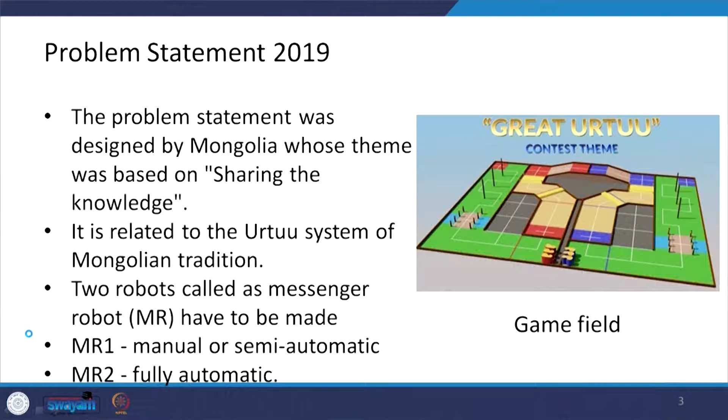Before we start, I would like to give you a brief of the problem statement. These few slides will be a repetition of the previous lecture, in order to maintain continuity. The problem statement was designed by Mongolia for Robocon 2019, and its theme was based on sharing knowledge. It is related to the Urtuu system of Mongolian tradition. Two robots called messenger robots have to be made: MR1, which is manual or semi-automatic, and MR2, which is fully automatic.

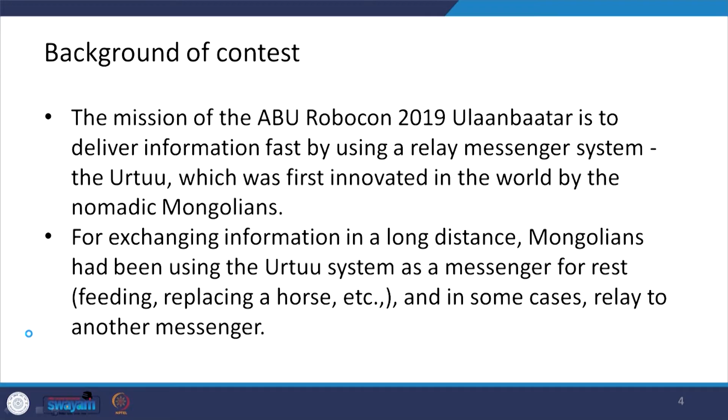If we look at the background of the contest, the mission of ABU Robocon 2019 Ulaanbaatar is to deliver information fast by using a relay messenger system, which they call Urtuu, first innovated in the world by nomadic Mongolians. For exchanging information over long distances, Mongolians have been using the Urtuu system as a messenger for rest, that is feeding, replacing a horse, etc., and in some cases relaying to another messenger.

By using the Urtuu system, a messenger was able to travel a distance of, say, 400 kilometers per day. This Urtuu system was an important invention that opened a new door for us to exchange and share knowledge regardless of space. Based on this concept, ABU Robocon 2019 Ulaanbaatar is designed to promote the idea of sharing knowledge. A match is between the red and blue team, and it lasts 3 minutes at most.

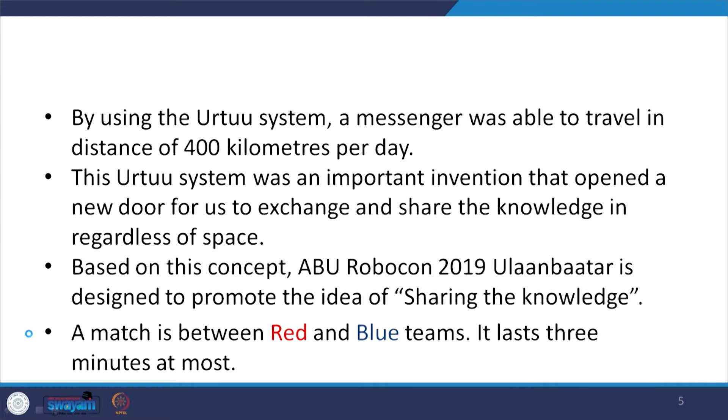We have seen in the previous lecture how the manual or semi-automatic bot covers the forest area and the bridges. Now, for the autonomous bot, the areas to be covered are the sand dune, tussock and the mountain. The tussock and sand dune are basically the obstacles which the four-legged robot is supposed to travel over, and then it has to climb the mountain area and reach the Uukhai zone.

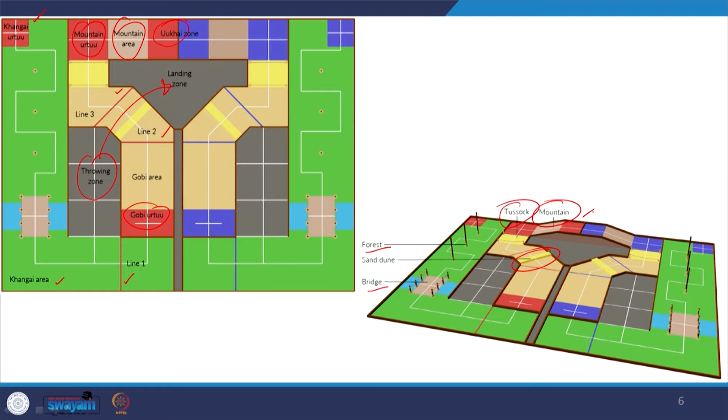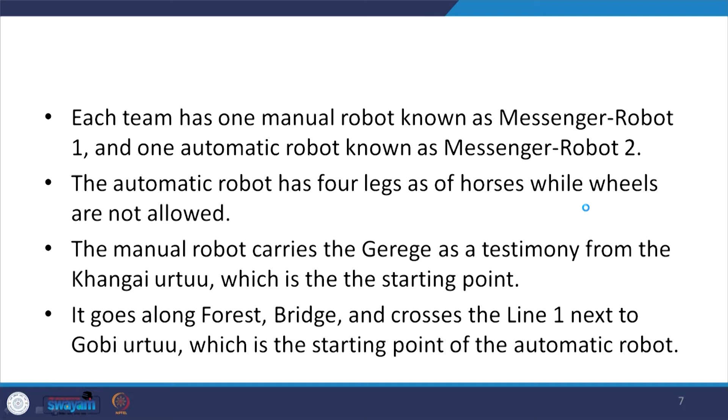Each team has one manual robot known as messenger robot 1 and one automatic robot known as messenger robot 2. The automatic robot has 4 legs like a horse, while wheels are not allowed. The manual robot carries the gerege as a testimony from the Khangai Urtuu, which is the starting point. It goes along the forest and bridges and crosses line 1 next to the Gobi Urtuu, which is the starting point of the automatic robot.

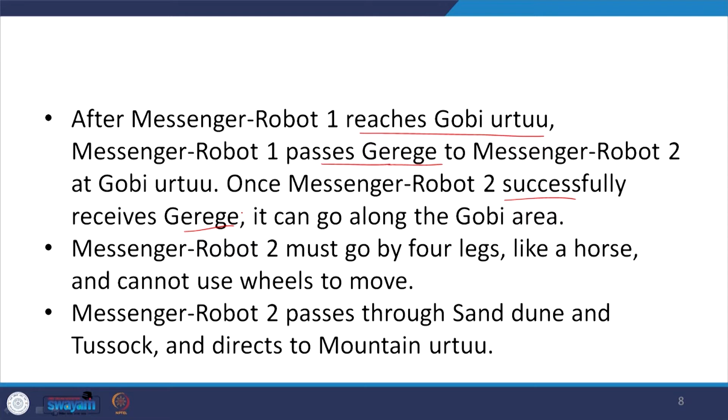After messenger robot 1 reaches the Gobi Urtuu, it passes the gerege to messenger robot 2, and once messenger robot 2 successfully receives the gerege, it can go along the Gobi area. Messenger robot 2 must go by 4 legs like a horse; the problem statement has the constraint that one cannot use wheels, and messenger robot 2 has to pass through the sand dunes and the tussock and head to the mountain Urtuu.

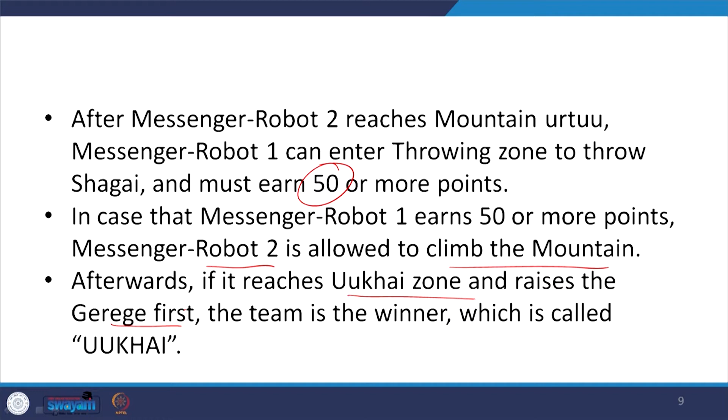After messenger robot 2 reaches the mountain Urtuu, messenger robot 1 can enter the throwing zone to throw the shagai and must earn 50 or more points. In case messenger robot 1 earns 50 or more points, messenger robot 2 is allowed to climb the mountain, and if it reaches the Uukhai zone and raises the gerege first, the team is the winner, which is called Uukhai. So, this was the problem statement.

In the last lecture, I talked about messenger robot 1. In this lecture, I am going to focus on the technology development for messenger robot 2. As you see, these robots are a very good example of a mechatronic system. You have the integration of actuators, the integration of sensors, a microcontroller controlling them, and a lot of programming involved in order to get the desired task.

So, the characteristic of this 4-legged robot is that it has to be fully autonomous. It needs to have the 4 legs. Its weight should be around 25 kgs. Initial dimension is 750 mm into 560 mm into 650 mm. The maximum dimension is 750 mm into 560 mm into 1000 mm, and it is symmetrical for both sides

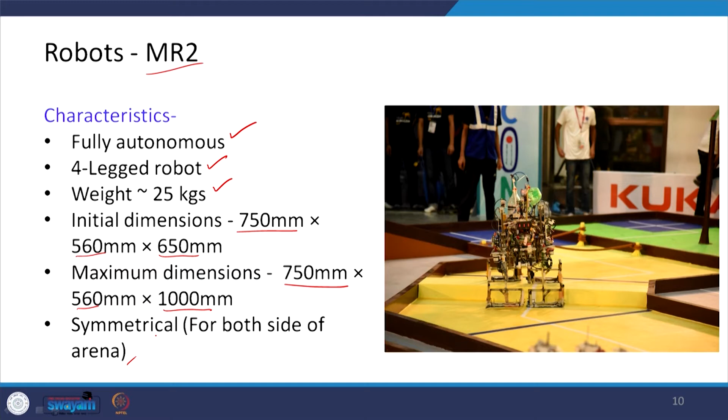of the arena. The mechanical aspect, a brief description of the robot developed by the IIT Roorkee team, is that it is a fully autonomous 4-legged robot, and each leg has 2 independent perpendicular degrees of freedom and 1 degree of freedom for turning, that is for the yaw motion, and this is the solid model of the robot which has been developed, and here are the 4 legs basically.

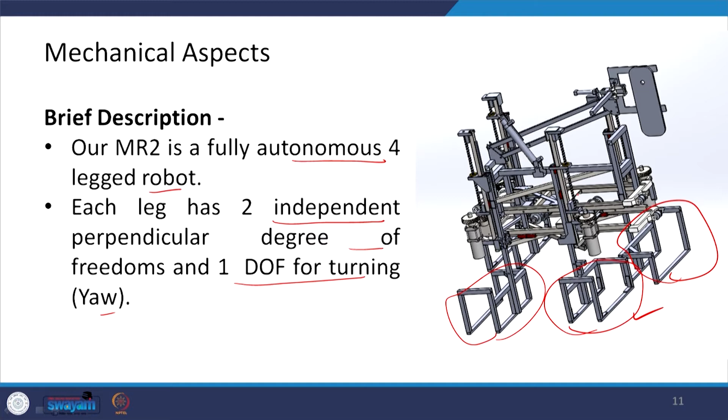So, this is say 1, this is another one 2, this is 3, and the 4th one you have there in the background, in the back side. So, the body, all the legs and the mechanism are made of a proper amalgamation of stainless steel, aluminum, mild steel, ABS and PLA, that is the 3D printed part.

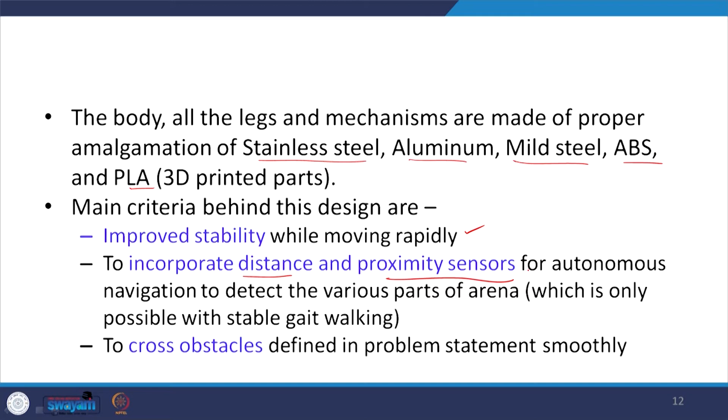Main criteria behind this design are the improved stability while moving rapidly, to incorporate distance and proximity sensors for autonomous navigation to detect the various parts of the arena, which is only possible with stable gait walking, and to cross obstacles defined in the problem statement smoothly. So, based on these criteria, the parts were designed.

So, let us look at the design and the mechanism. So, first is the main chassis. This is the main chassis actually. The actuators and sensors used here are a 12 volt DC motor with say 25 by 1 planetary gear reduction, and an optical encoder with 1024 pulses per rotation, and the main chassis of the body of the quadruped is made by connecting the two similar sliding layers as shown over here using a customized lazy Susan like revolute joint.

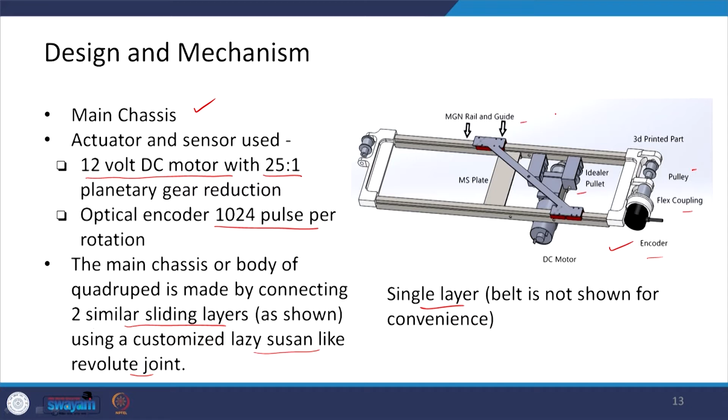This is the single layer basically where you can see you have the idler pulley, pulleys are there, flex coupling is there, encoder is there. And this is the MGN rail and the guide provided over here. Both layers are stacked and are independent to move about the common central axis perpendicular to both layers by the revolute joint. Each layer has a sliding module and a DC motor coupled to toothed pulleys which act both as driving as well as idler pulley.

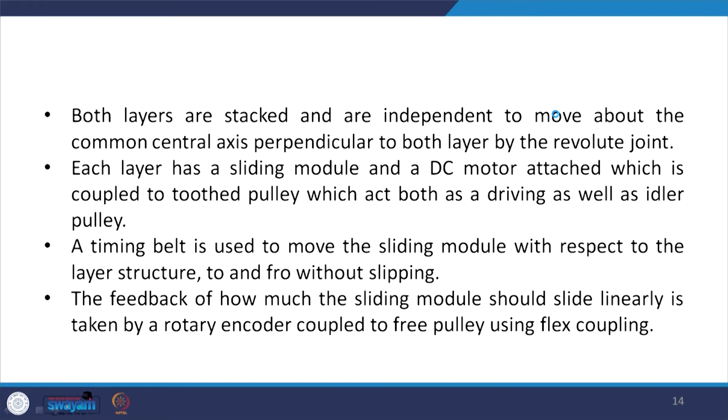A timing belt is used to move the sliding module with respect to the layer structure to and fro without slipping, and the feedback of how much the sliding module should slide linearly is taken by a rotary encoder coupled to the free pulley using the flex coupling. Then each layer is attached with two parallel slide rails, as I said, for prismatic joint on a 20 gauge square stainless steel pipes. The sliding guides of both these rails are joined and attached to a diagonal pair of leg modules via trusses.

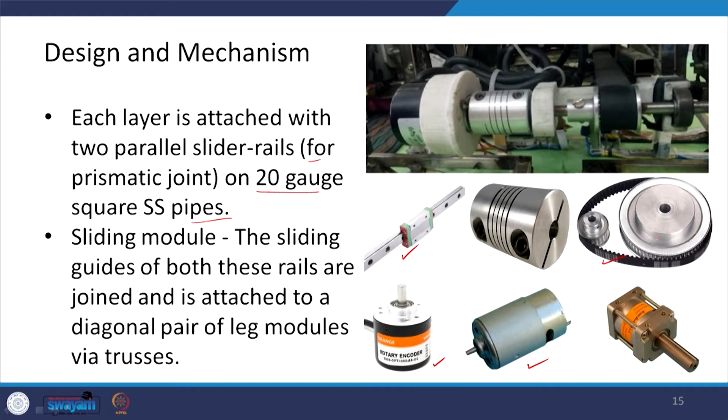These are the various parts which have been used basically. You can see the sliding module over here, you have the rotary encoder, you have the actuator, you have the pulleys. So, all these things are there. Thus, each layer is attached to a slider module which is then attached to a diagonal pair of leg modules. The connection and trusses are designed so as to reduce the number of joints and reduce the twisting moment of the body while walking.

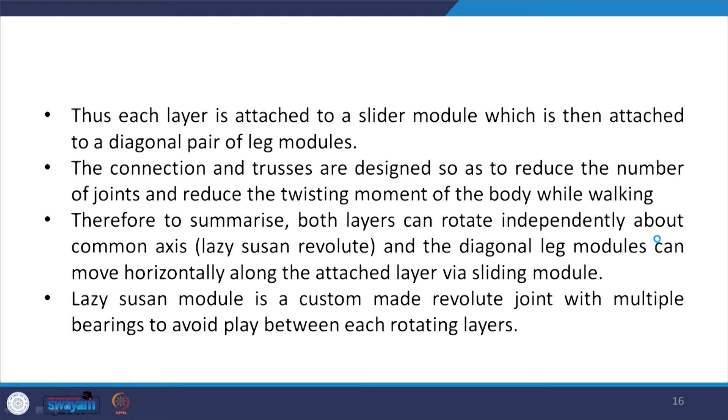Therefore, to summarize, both layers can rotate independently about the common axis and the diagonal leg module can move horizontally along the attached layer via the sliding module. The lazy Susan module is a custom made revolute joint with multiple bearings to avoid play between each rotating layer.

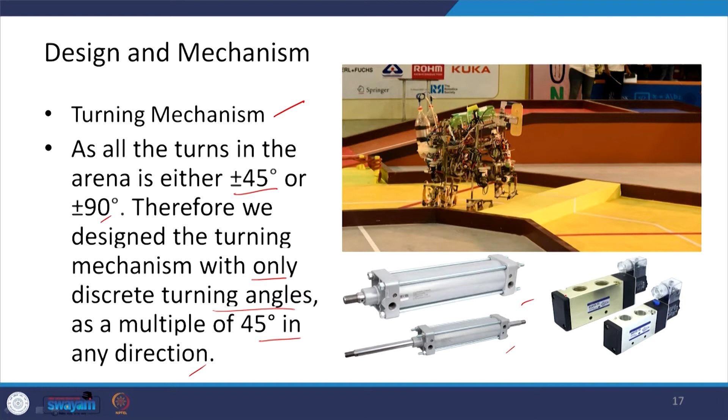Then there is a turning mechanism for the robot to turn. As all the turns in the arena are either plus minus 45 degree or plus minus 90 degree, the IIT Roorkee team designed the turning mechanism with only discrete turning angles as a multiple of 45 degree in any direction. For that purpose, they use the pneumatic cylinders over here, and the turning was designed to be as fast as possible.

Therefore, they used the actuation of pneumatics to turn the robot, and a single pneumatic with optimum stroke length and bore diameter is attached between the two layers, such that the body of the pneumatic is attached to the lower layer and the end point of the shaft is attached to the upper layer, both by revolute joint. No sensor is used in turning, as the design is mechanically constrained to rotate only 45 degree at a time. Thus, it decreases the complexity of the robot significantly.

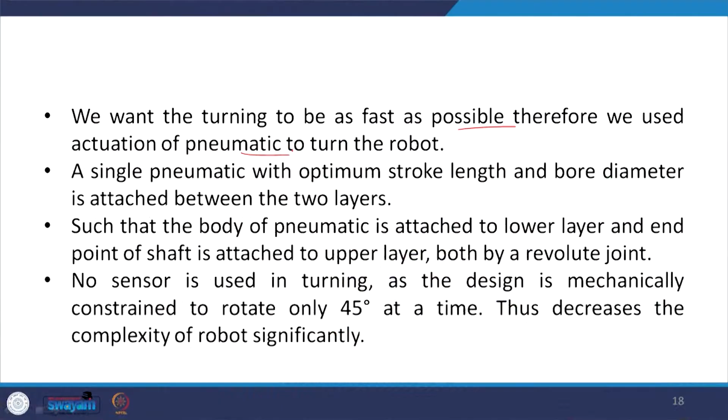So, here basically the principle behind turning is that the robot needs to extend and contract the pneumatic full stroke to rotate the robot 45 degree in one direction, and for the other direction turning, just change the order of the leg pair.

Okay, so this is what is done over here. Let us look at stroke 1 and then we will be looking at stroke 2. The red arrow shows the direction of movement of the robot. You can see initially that the robot is moving in this particular direction.

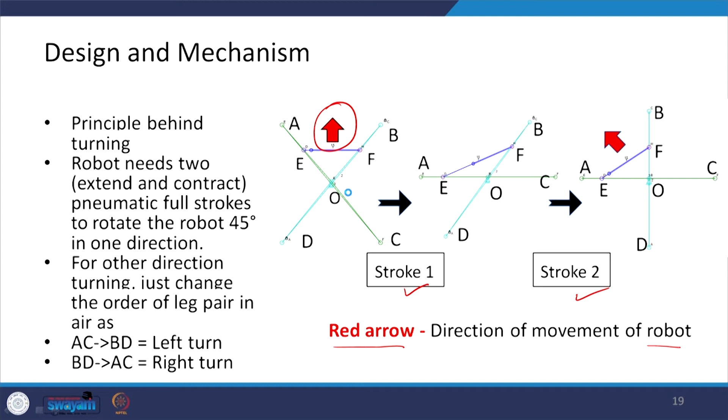Here A, B, C, D be the legs of the robot, where AC is attached to one layer and BD is attached to the other layer. At a time when legs BD are on the ground supporting the robot while AC is in the air, the pneumatic is actuated, basically stroke 1, and this will rotate the leg AC by 45 degrees, as you can see, and with this one actuation this will be turning by 45 degrees.

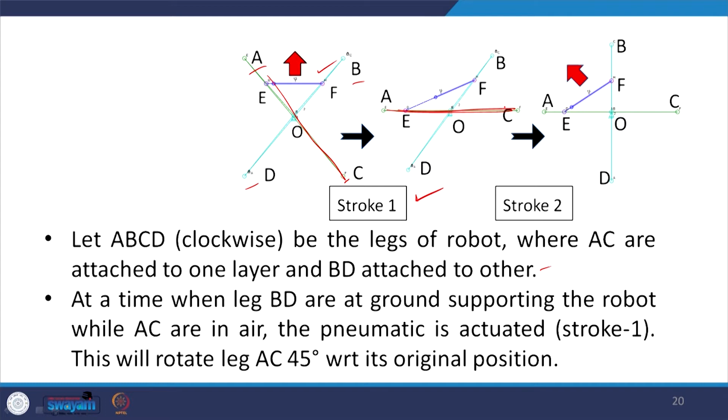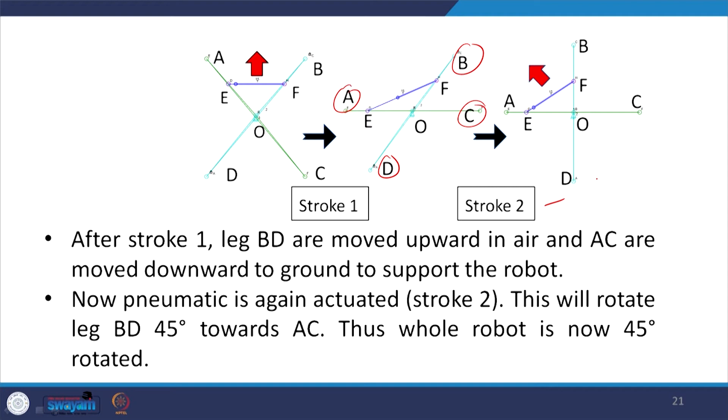For the next 45 degrees, after stroke 1, leg BD are moved upward in air, and AC are moved downward to the ground to support the robot. Now the pneumatic is again actuated, that is stroke 2, and this will rotate leg BD by 45 degrees. So this has rotated BD by 45 degrees, and thus the whole robot turns by 45 degrees. This is how the turning is achieved.

Then coming to design and mechanism, we have the leg module. This leg module is designed such that the moving module can move up and down perpendicular to the ground, independent of the other leg, with respect to the static module.

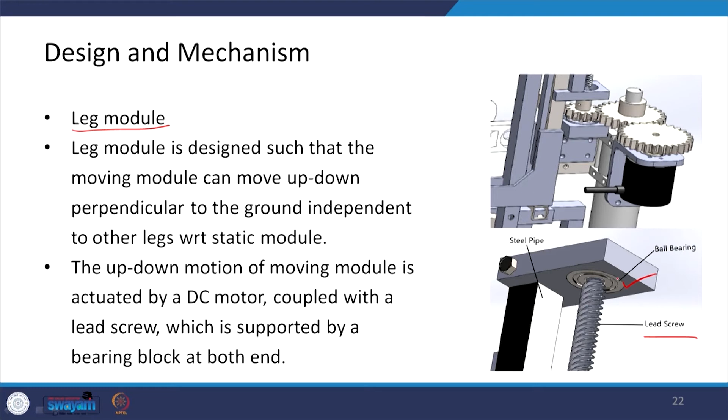The up-down motion of the moving module is actuated by a DC motor coupled with a lead screw, which is supported by bearing blocks at both ends. You can see the lead screw here, and here are the ball bearings supporting it. Here we have the steel pipe.

While making the leg module of the robot, multiple things were considered: minimum fatigue bending, lower center of mass for stability, fast continuous smooth motion for greater speed, so that the task could be completed within the stipulated time of a maximum of 3 minutes.

Then no load on actuators when standing still, high strength to weight ratio, and foot design as per the obstacle. The DC motor is coupled to the lead screw by aluminum gears with suitable gear ratio, so as to increase the final speed of rotation of the lead screw and thus the motion of the leg.

The same gear is also coupled to a 3D printed gear attached to a rotary encoder to measure the rotation of the lead screw.

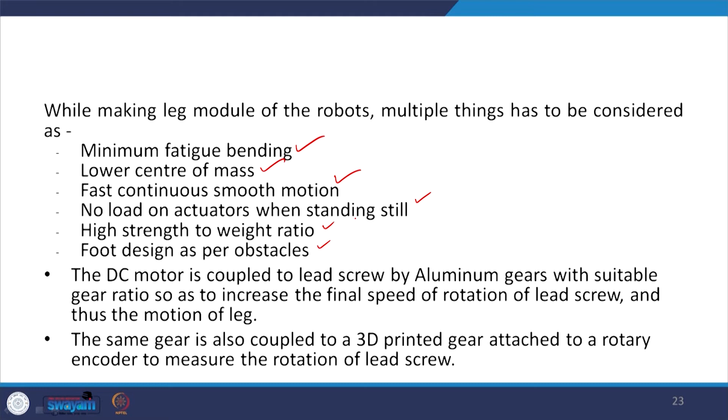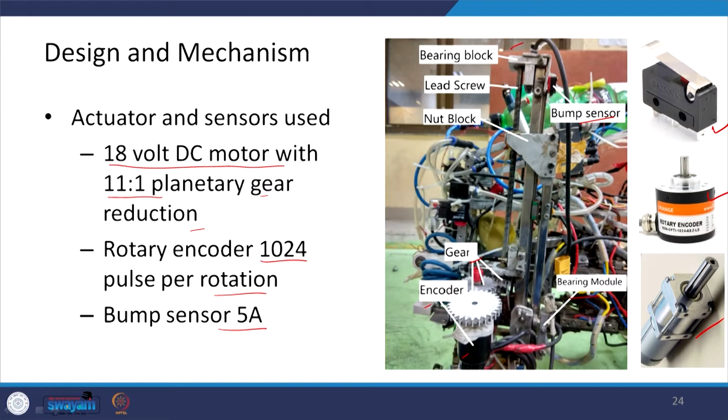Actuators and sensors used are the 18 volt DC motor with 11 by 1 planetary gear reduction, rotary encoder with 1024 pulse per rotation, and a bump sensor. Here you can see the bump sensor, rotary encoder, and this is the motor with the planetary gear reduction. You can see the bearing module, the encoder gear, the bump sensor, the bearing block, lead screw, nut block, and so on.

On the steel pipe parallel to the lead screw, a bearing base slider rail is mounted on the static module. The two slider guides and lead screw nut module, separated by a distance so as to avoid bending moment, are attached to the moving module steel pipe which moves vertically.

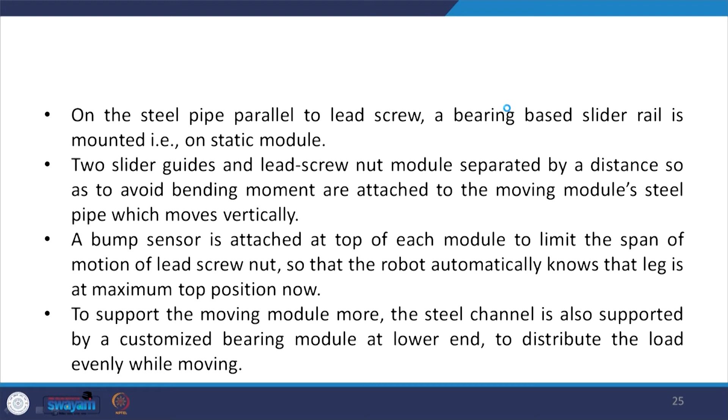A bump sensor is attached at the top of each module to limit the span of motion of the lead screw nut, so that the robot automatically knows that the leg is at the maximum top position.

To support the moving module more, the steel channel is also supported by a customized bearing module at the lower end to distribute the load evenly while moving.

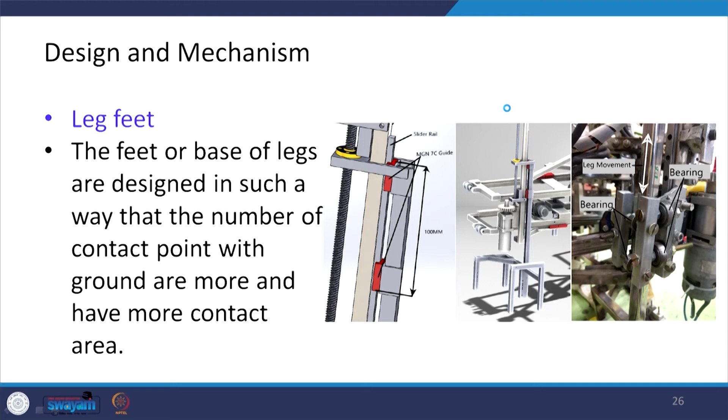Looking at the leg feet, the feet or base of the legs are designed so that the number of contact points with the ground are more and have more contact area, so that the stability of the bot is maintained. More contact points with the ground increase the stability of the robot, while increase in contact area increases the grip of the robot.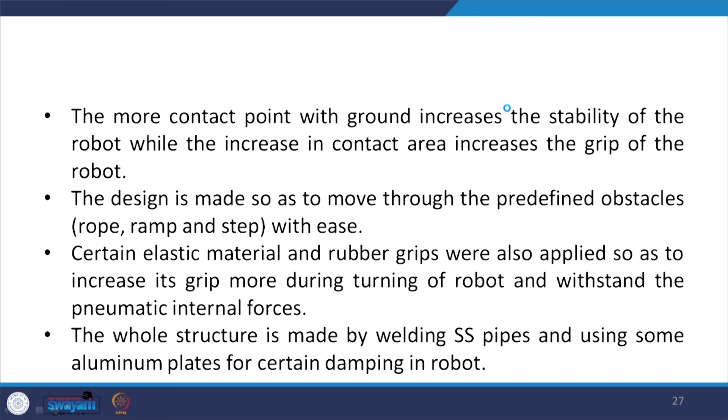The design is made so as to move through predefined obstacles such as rope, ramp, as well as step with ease. Certain elastic material and rubber grips were also applied so as to increase the grip during turning of the robot and withstand the pneumatic internal forces. The whole structure is made by welding stainless steel pipe and using aluminum plates for certain damping in the robot.

Now let us look at the Gerege gripping and raising mechanism. The gripper of the Gerege is same as the Messenger Robot 1, actuated by pneumatic and spring. It is symmetrical and has the gripping hand for different sides of the arena.

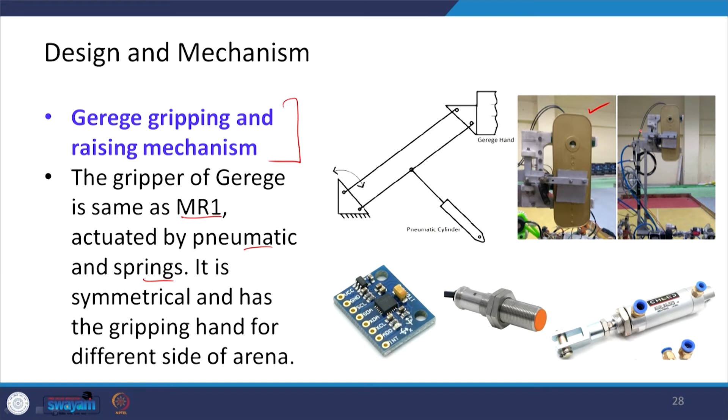So, this is how you can see that this Gerege has been gripped over here.

The Gerege raising mechanism is designed according to the constraints on the orientation of the Gerege while raising. A 4-bar linkage mechanism is used to raise the Gerege to the required height by a large stroke pneumatic actuator, so that the orientation of the Gerege remains constant.

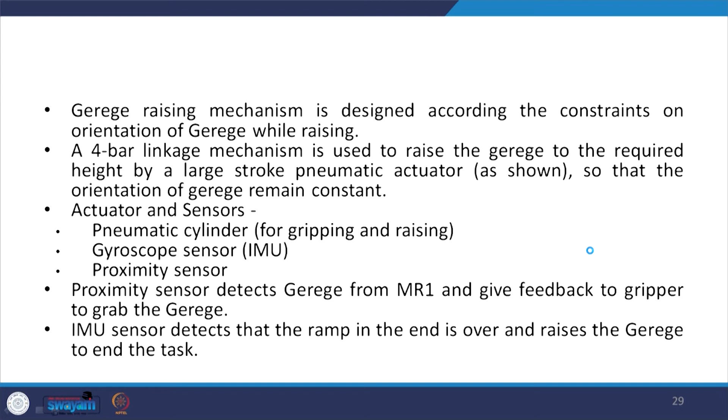Actuators and sensors used in this include the pneumatic cylinder for gripping and raising, a gyroscope sensor, and a proximity sensor. The proximity sensor detects the Gerege from MR1 and gives feedback to the gripper to grab the Gerege. The IMU sensor detects that the ramp at the end is over and raises the Gerege to end the task.

Other electronics parts used are the microcontroller. Arduino Mega ADK and Atmega 2560 were used, with an operating voltage of 5 volts, 54 digital input/output pins, 15 PWM outputs, 16 analog input pins, and a clock speed of 16 megahertz.

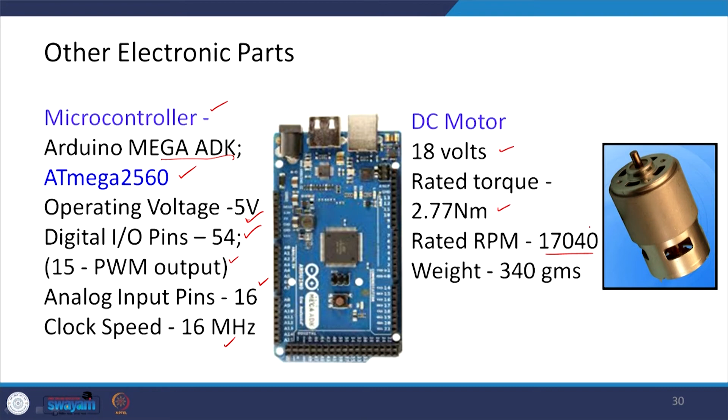Then the DC motor is 18 volt, with rated torque of 2.77 Newton meter, rated RPM of 17,040, and weight of approximately 340 grams.

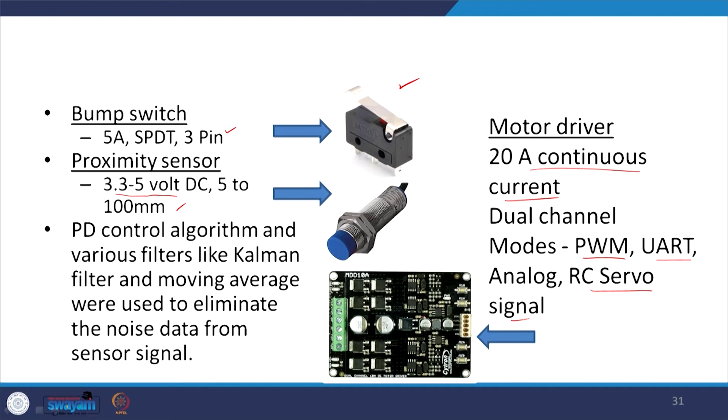Then the bump switch is 5 ampere, single pole double throw, 3 pin. The proximity sensor runs on 3.3 to 5 volt DC with a range of 5 to 100 mm. The motor driver handles 20 ampere continuous current, dual channel, and takes PWM, UART, analog, and RC servo signals. A PD control algorithm along with various filters like the Kalman filter and moving average were used to eliminate noise from the sensor signal.

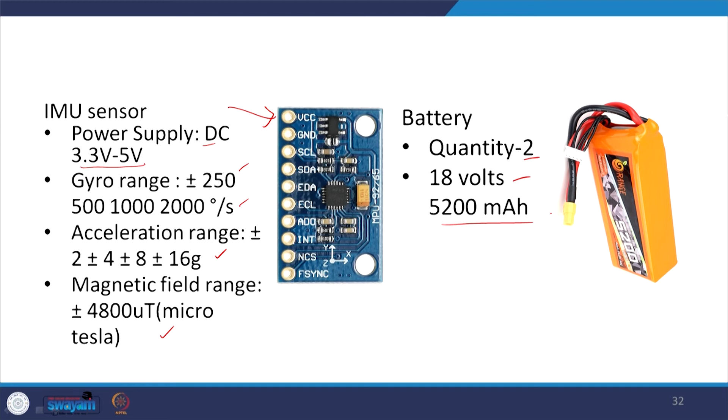The IMU sensor used is shown here. Its ratings are: power supply DC 3.3 volt to 5 volt, gyro range plus minus 250 degrees per second among other available ranges, with corresponding acceleration and magnetic field ranges available. The battery used consists of two units of 18 volt, 5200 milliampere hour current capacity.

The first and foremost task was Gerege grabbing and turning on. This Gerege has to be taken from messenger robot 1, then walking straight for a fixed distance, followed by turning with trajectory control. Three obstacles were provided in the path of messenger robot 2: the sand dune, tussock, and the mountain, and finally Gerege raising.

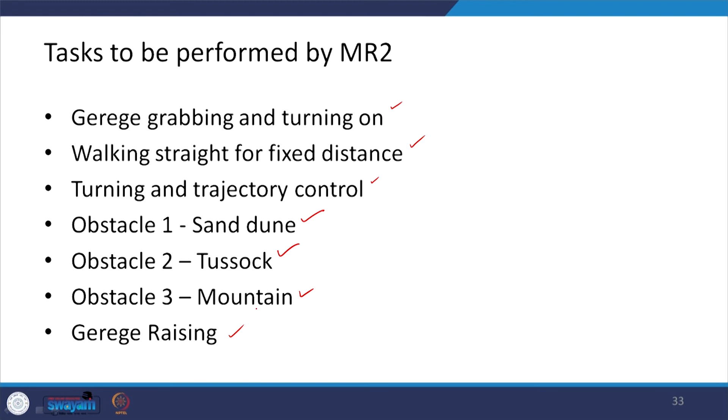Now let us look at these tasks. The task to be performed by messenger robot 2 requires the robot to work autonomously, as I have been discussing. First is Gerege grabbing and turning on.

As the fast moving messenger robot 1 moves along the wall close to MR2, an inductive proximity sensor detects the Gerege on messenger robot 1, and the gripper on MR2 grabs the Gerege the instant it comes into gripping range. As the gripper on MR2 grabs the Gerege, the robot automatically starts moving, because the Gerege gripping acts as a start button for messenger robot 2.

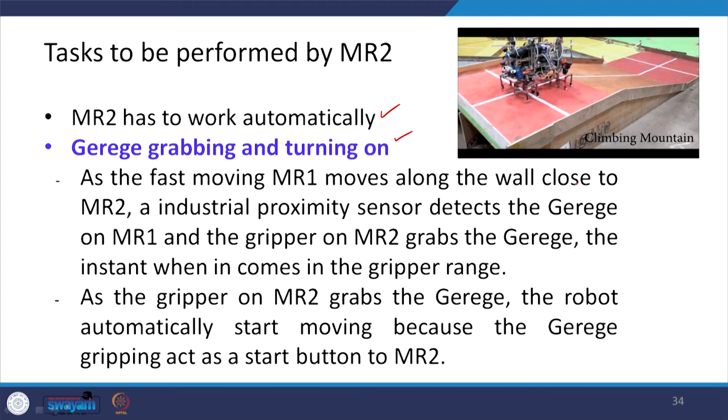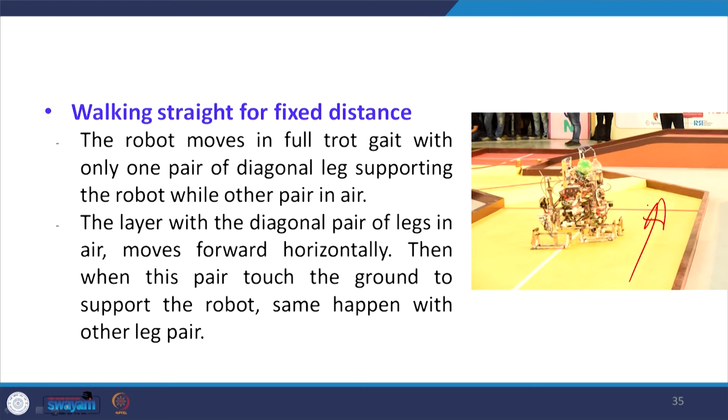Now, walking straight for the fixed distance: the robot moves in full trot gait, meaning one set of diagonal legs are in the air while the other set of diagonal legs supports the bot on the ground, with only one pair of diagonal legs supporting the robot at a time.

The layer with the diagonal pair in the air moves forward horizontally. When this pair touches the ground, it supports the robot, and the same happens with the other pair of legs. Each leg's feet follow an approximate isosceles triangular trajectory, combining horizontal motion of the layers and vertical motion of the leg-moving module, just like the extruder of a 3D printer. Data from the encoder coupled with a pulley is used to measure the distance travelled by each layer and thus the robot.

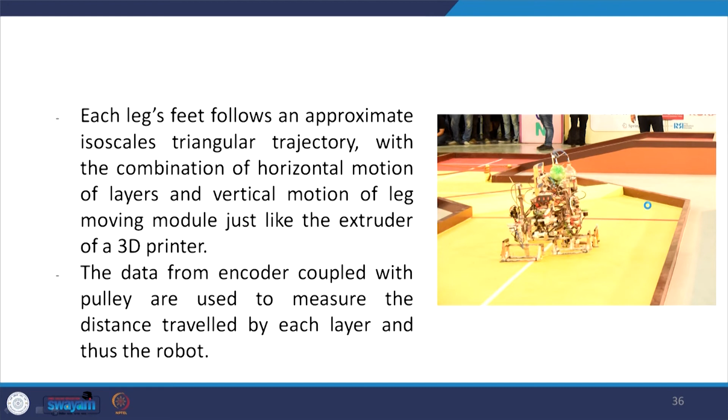Then comes the turning and trajectory control.